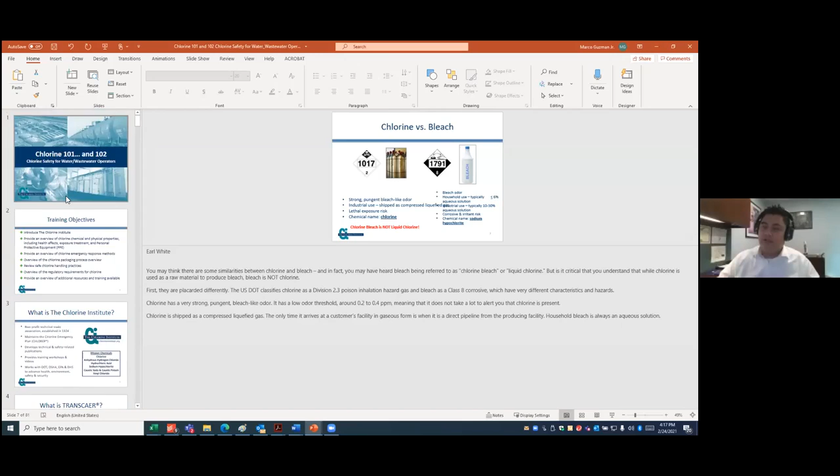Yeah, sorry Earl, I had to reshare my screen. Not a problem, so hopefully you can see it now. Yep, if you can see it. Yep, I can see it just fine. Which one is it? Oh, I think I lost it there again. Hold on, just a second. It's this one. Screen number 2, okay, there it is. Share. Okay, and if any of y'all have questions after this, please feel free to submit any questions that you have. Is there any way you can blow that screen up a little bit more? There you go, yes. Okay, the first thing that go ahead. Go ahead. Oh, okay, I was just going to start off, but if you had something to say, you can go ahead. No, go ahead Earl. Again, I'm sorry, the slides are a little wonky.

No problem. Okay, the first screen we're looking at here is chlorine versus bleach. And as you can see, the chlorine is on the left-hand side of the screen. It's got a UN number of 1017, and it's got a number 2 down at the bottom. The number 2 stands for what class it falls in. It falls into class 2, which means it's a gas. That's how they're classifying it, how the United Nations classifies it.

The one on the right is, of course, bleach, and it's got a UN number of 1791. There's always a lot of confusion amongst people. People use bleach for pools and they call it chlorine, and it's not, bleach is not chlorine. They're 2 different items. Chlorine has a strong, pungent bleach-like odor, and it has a lot of industrial uses, and it's shipped as a compressed liquefied lethal gas, so there is a lethal exposure risk, and the chemical name is chlorine.

And of course, bleach always has a bleach-like odor. What is typically used in your house is less than 6% in strength. What is typically used at a water treatment plant can be anywhere from 10% in strength all the way up to 30% in strength. It is a liquid, so we all know that. And it's corrosive, bleach is, and its chemical name is sodium hypochlorite, but everybody just calls it bleach.

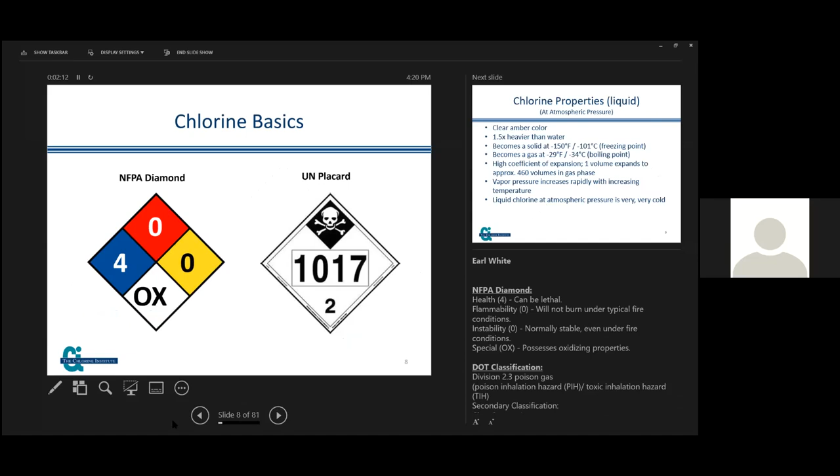Okay, chlorine is a clear amber color, but that's only when it was contained inside of a container. If you had a clear container and could look at liquid chlorine, it would be a clear amber color. We're never going to see that unless we're in a lab. It becomes solid at negative 150 degrees Fahrenheit, that's the freezing point of it. And it becomes a gas at negative 29 degrees Fahrenheit.

It has a high coefficient of expansion. Volume expands approximately 460 times. One volume of liquid chlorine will expand 460 times in volume when it turns into a gas. So that's what we're trying to get to right there.

The vapor pressure increases rapidly with increasing temperatures. So the hotter it gets, the more pressure is going to develop in that container. Liquid chlorine at atmospheric pressure is very cold. So if you had a leak of liquid chlorine anywhere, that area near the leak is going to be cold. As a matter of fact, it'll go into what is called auto refrigeration if it's a small enough leak. If it's a big leak, it's just going to all come out.

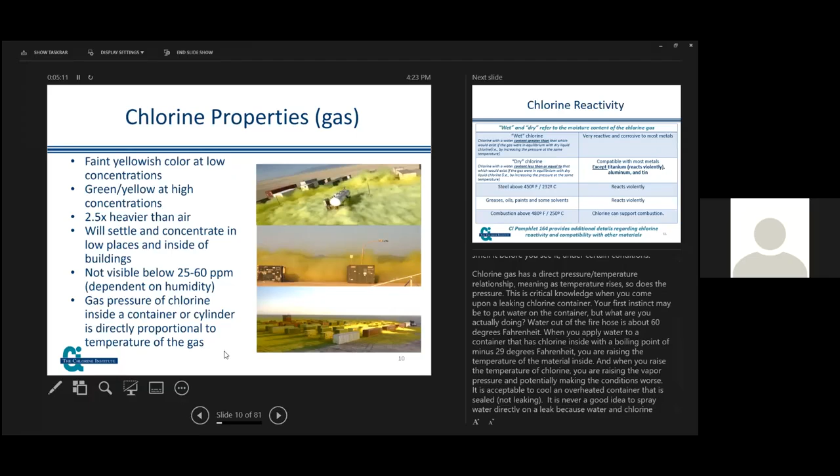Inside a container or cylinder, the pressure of chlorine is directly proportional to the temperature of the gas, which means that if you put a heat source on that cylinder, the pressure is going to build up in that cylinder. So we want to try to keep heat away from those objects.

This is wet and dry chlorine, the difference between the two. Wet chlorine is measured off of what dry chlorine is. They compare the two together, and if it's got more moisture than dry chlorine should have, then it's considered wet chlorine, no matter how much, even if it's just a little bit or a lot. If it's got more than what dry chlorine should have, it's considered wet chlorine, and it is very reactive and corrosive to most metals. It forms two different types of acid, which eats steel rather rapidly.

Dry chlorine is chlorine with a water content less than or equal to that which would exist in equilibrium with dry liquid chlorine by increasing the pressure at the same temperature. It's compatible with most metals except titanium, and it reacts violently with aluminum and tin, and with steel above 450 degrees. So you never want old dry chlorine to be in a steel container and reach a temperature of 450 degrees Fahrenheit or higher.

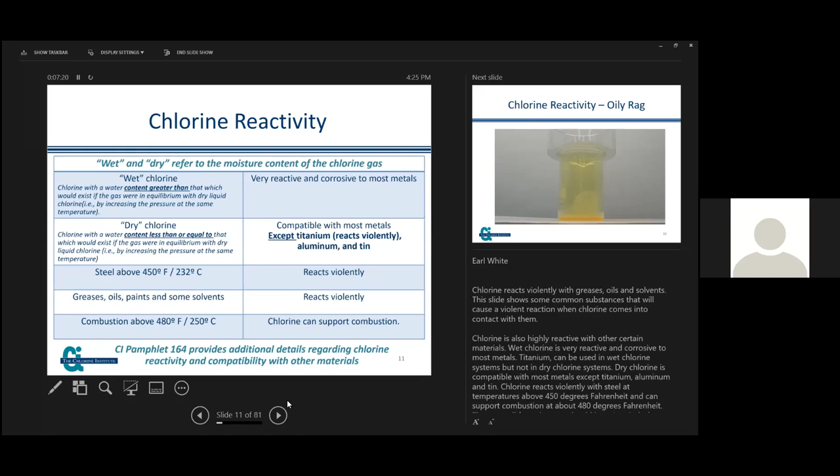It reacts violently with greases, oils, paint, and some solvents. Some metal like steel wool will burst into flames - it supports combustion above 480 degrees Fahrenheit. Chlorine can support combustion, and that's the key word, it can support combustion. That's the reason why in the National Fire Protection Diamond you see a 0 in there - it'll support it, but it won't catch on fire itself. It's got to have something that it's going to react with, like the steel, when the steel reaches 450 degrees Fahrenheit.

And this is a video showing steel wool. Can you hear the video or not? No, we cannot. Oh, okay.

So what they did there is they took a piece of steel wool and put it in a container, came down to about a half inch or so. This is a good reaction - this is even better.

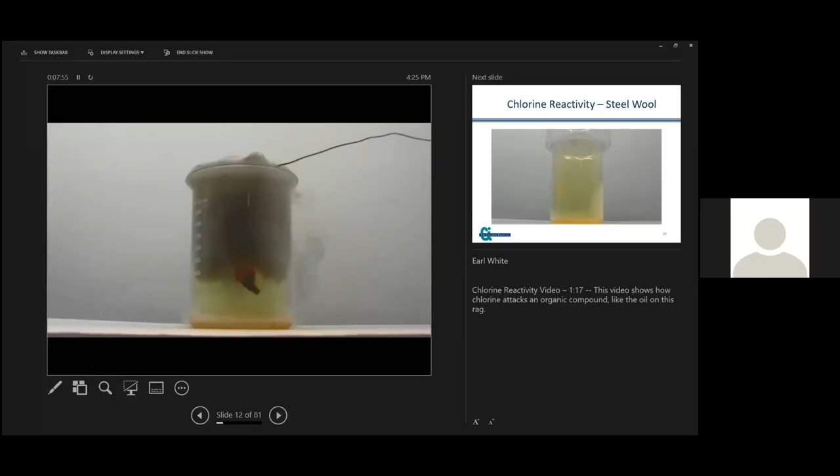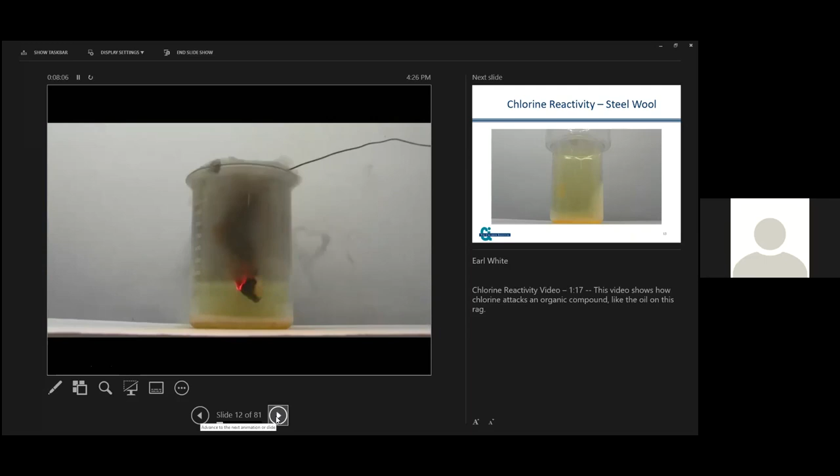See some of the flame up in here. Yeah. Here we go now, look at that. Wicked, huh? That's awesome. We got the sparkles in there. Y'all can pull that down a little bit if you want.

So that video shows just how instantaneously it will react with something that's not compatible with it, like steel - that was steel wool there. It'll react violently with grease, oil, and other things that it's not compatible with.

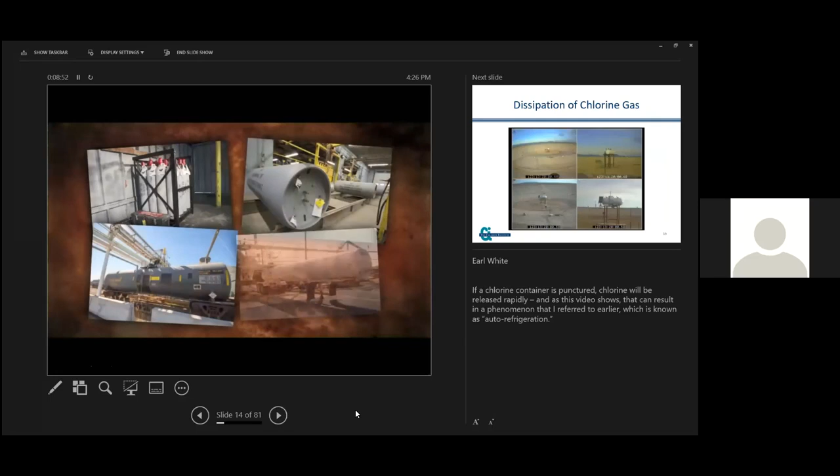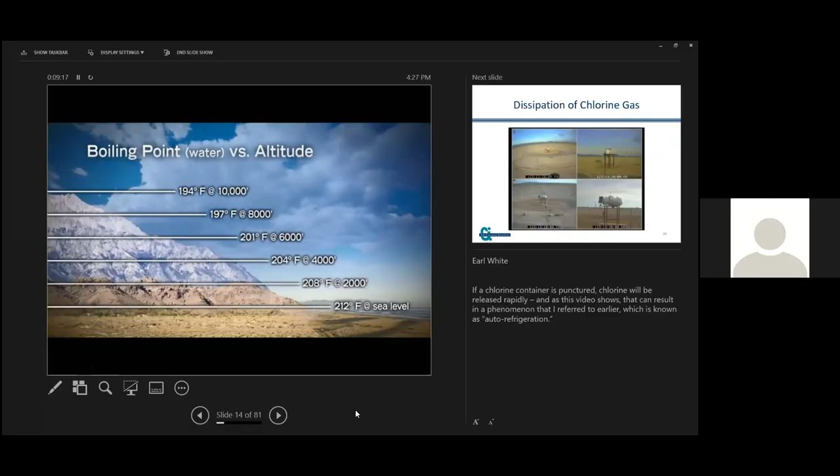Cylinder, ton container, tank car, or cargo tank holds a liquefied gas under pressure. The temperature of that liquefied gas is cool, but not so cold that the exterior of the container would be cold to the touch. At higher pressures, liquids boil at higher temperatures. At lower pressures, liquids boil at lower temperatures. This is why water boils at lower temperatures at higher elevations above sea level - the atmospheric pressure is lower, so the boiling point is lower.

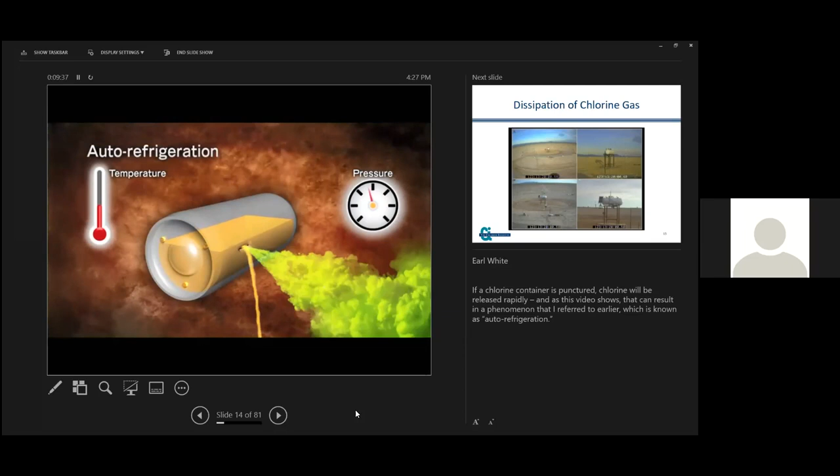When a chlorine container is punctured, allowing the chlorine to release, at first the chlorine will escape rapidly. As the chlorine is released, the container that was under pressure will now equalize in pressure with the atmosphere. Once the liquid level drains below the puncture point, auto-refrigeration takes place.

Auto-refrigeration is the result of chlorine quickly escaping from the container, which causes the chlorine to cool down below its boiling point at the new lower pressure condition. It becomes colder because it is no longer under pressure from being in an enclosed container.

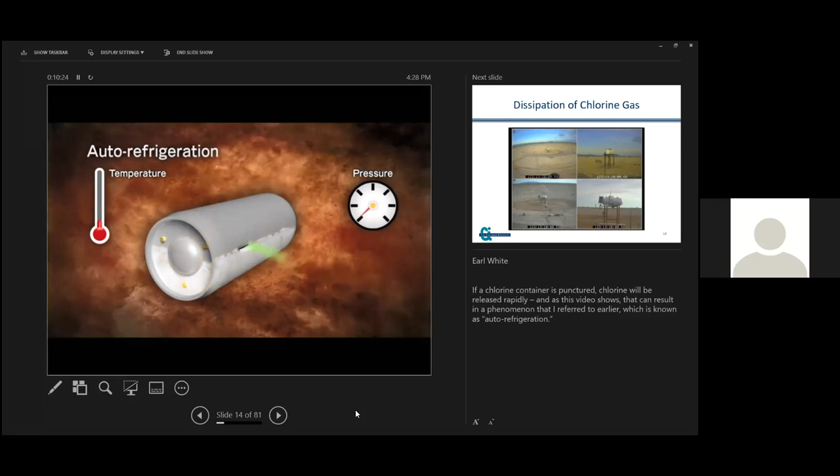Because the chlorine remaining in the container is so cold, a visible frost layer will form on the outside of the container at the liquid line, typically the level of the puncture. When this occurs, the rate of release will significantly decrease, although there is still a considerable amount of liquid chlorine remaining. However, any heat source, like water, or agitation, like moving the container to a secure location, can cause the remaining liquid chlorine to vaporize and allow more vapor chlorine to escape.

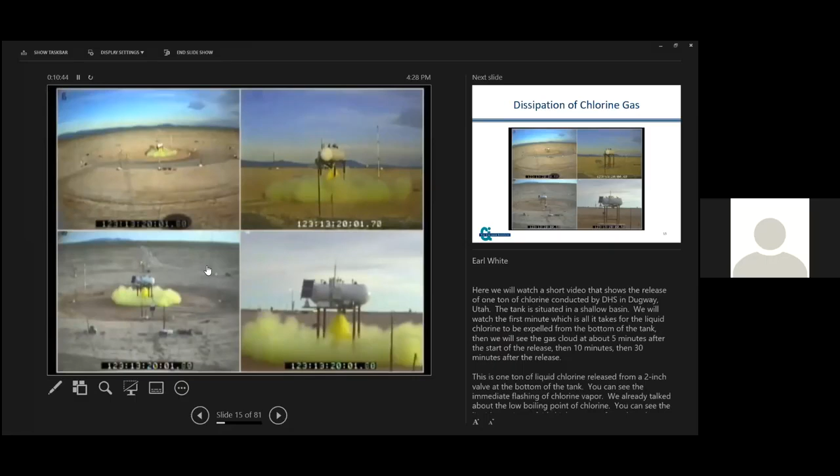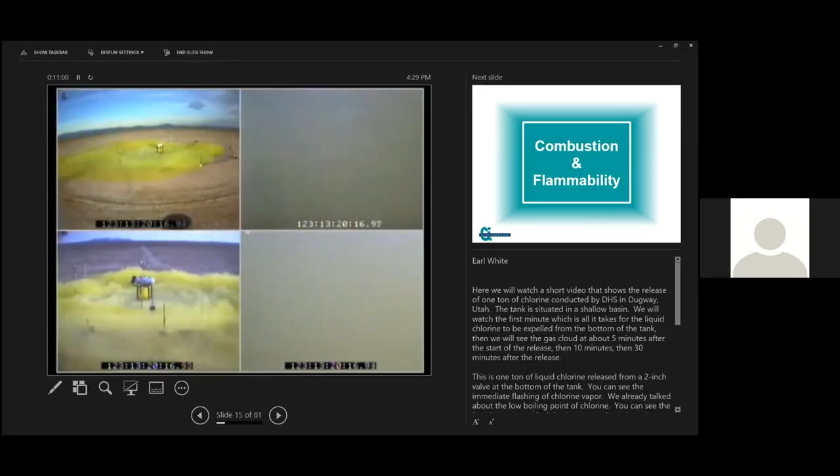This was out at Jackrabbit 1, 2, and 3, where DHS, Department of Homeland Security, wanted to see what would happen during the release of chlorine. We released anywhere from 5 tons to 10 tons at different times, all the way up to 20 tons that we did in one shot, one time.

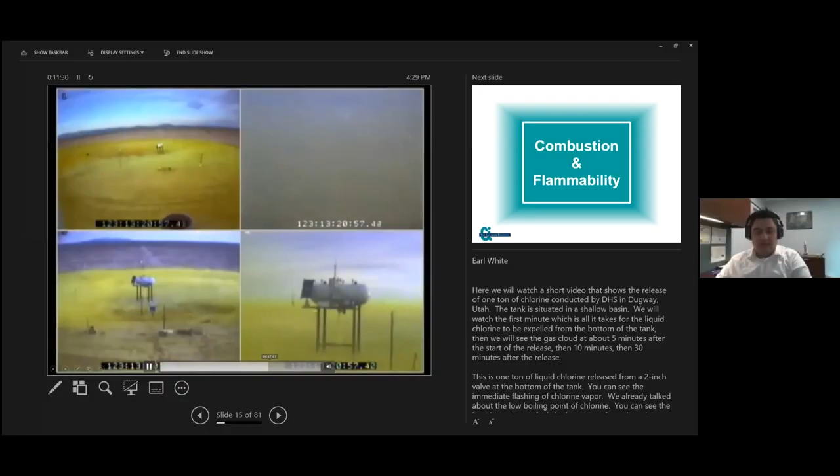I think this video wants to compare the initial release to 10 minutes after. We can see the cloud at the initial release, and then 10 minutes after, you can see the cloud sort of become smaller. However, there's still chlorine present - you can see the green, white, yellow, greenish hue there with chlorine.

And even then, this is at 30 minutes after the release. You can still, even though you cannot see it anymore, there's still chlorine present. Is that correct? Right, there was.

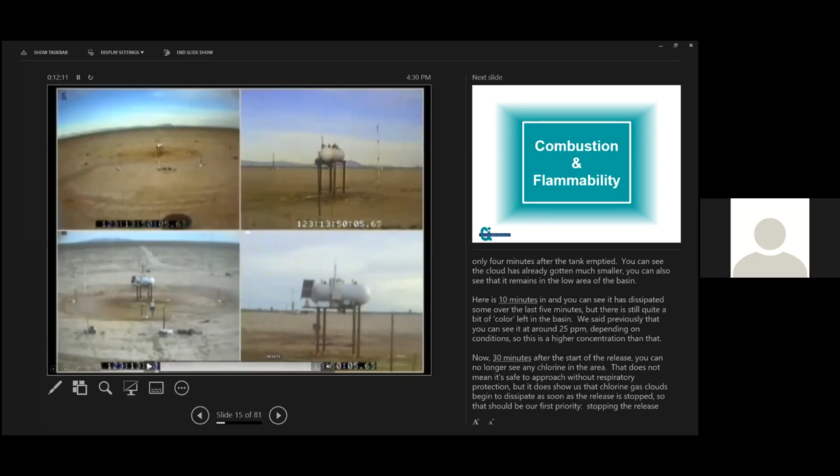Now, wind also played a role in these tests because we waited for the wind to be blowing at a certain speed and in a certain direction. What should be noted about one of these tests - I think the first one we did - we had some birds come and fly and sit on top of the tank right after we did the release, and then they flew off afterwards. It didn't hurt any of them, because they were high enough up off the ground. If they had been down along the ground, it would have damaged them.

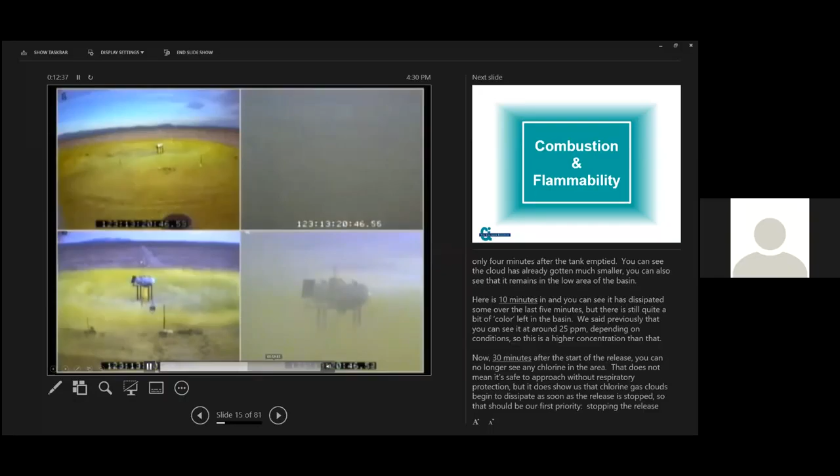Combustion and flammability. Go ahead and click to the next screen.

Chlorine is not flammable. It goes back to the fire diamond again - there's a 0 up there in the fire part of it. Chlorine will support combustion in the presence of ignited flammable materials, like that steel wool. Combustion requires 4 things: heat, fuel, oxidizer, hence the reason chlorine supports combustion - it has secondary classification as an oxidizer - and a chemical chain reaction.

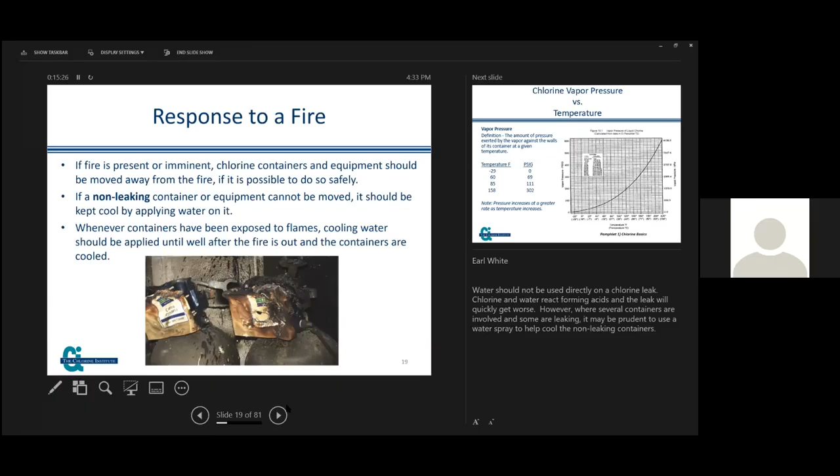Until the containers are cool. This one seems to jump around quite a bit.

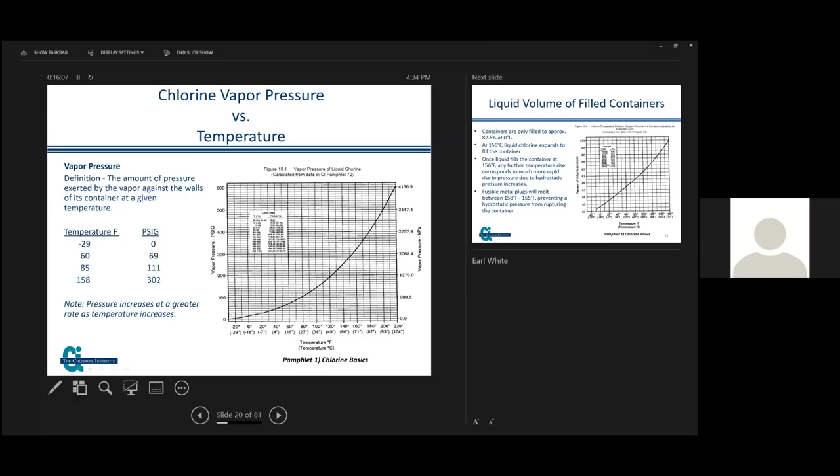The definition: the amount of pressure exerted by the vapor against the walls of its container at a given temperature. So what this is showing is what would happen if that container got hot, and it shows you that the pressure drastically increases. And when it starts to increase and it gets too much, you're going to cause something to explode, or the fuse plug is going to release. Next screen, please.

Containers are only filled approximately 82.5%, so they're never filled completely full. At 156 degrees Fahrenheit, liquid chlorine expands to fill the container. That's the reason why we only fill them to 82.5.

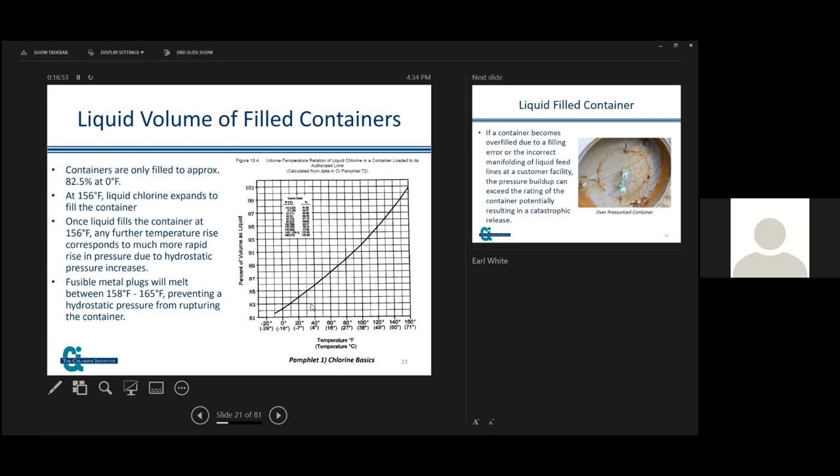Once liquid fills the container at 156 degrees, any further temperature rise corresponds to a much more rapid rise in pressure due to hydrostatic pressure increases, as this chart shows. You can look on one side and see the temperature and the pressure that is increasing.

If a container becomes overfilled due to filling error or incorrect manifolding of liquid feed lines at a customer's facility, the pressure buildup can exceed the rating of the container, potentially resulting in a major disaster.

What you're looking at on a ton container, the ends will pop out. It's designed that way. They won't completely break away from the container, they just bulge outwards. That allows it to expand a little more. Both ends are capable of doing this. Generally, if it happens, you'll start developing small leaks on the container around the valves and fuse plugs. That's something you want to watch out for.

Vapor expansion: the amount of vapor that is produced when the liquid vaporizes. Vapor expansion of liquid chlorine is approximately 460 to 1. So a 150-pound cylinder of chlorine, if it's full and it's released, will fill a room that is 10 foot by 10 foot by 8 foot with 100% chlorine gas.

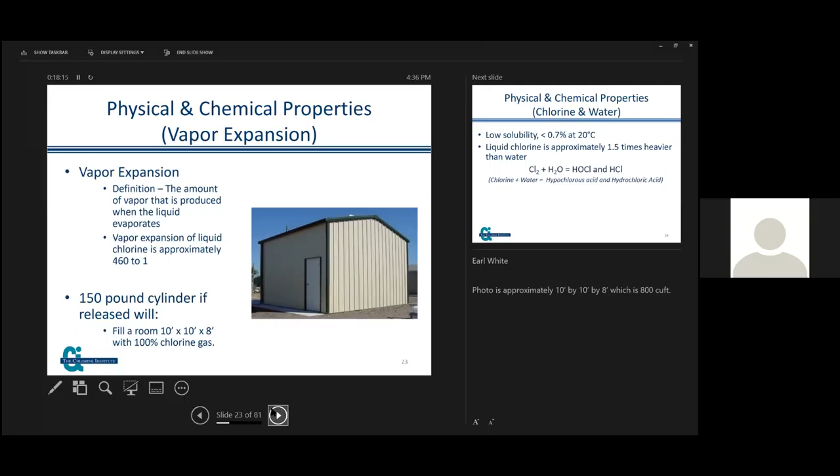If you mix it with water, it really doesn't mix well with water, as shown here. Less than 0.7% will mix with water at 20 degrees Celsius. Liquid chlorine is approximately 1.5 times heavier than water, which gives you the equation for that.

It also talks about the two acids there, hypochlorous and hydrochloric. At the bottom, it shows the two acids that will form when you mix chlorine with water: hypochlorous acid and hydrochloric acid.

Chlorine health effects: at 0.2 to 0.4 parts per million, that's the odor threshold, when you can start smelling the chlorine. At 0.1 part per million, that's the ACGIH 8-hour time weighted average suggested for people. At 0.4 parts per million, that is the short-term exposure limit. At 1 part per million, that's the OSHA ceiling limit.

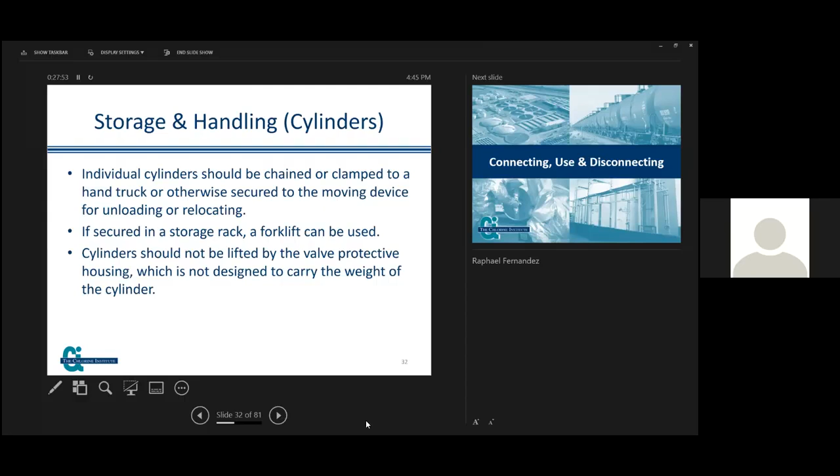Connecting and disconnecting. Chlorine cylinders, typical.

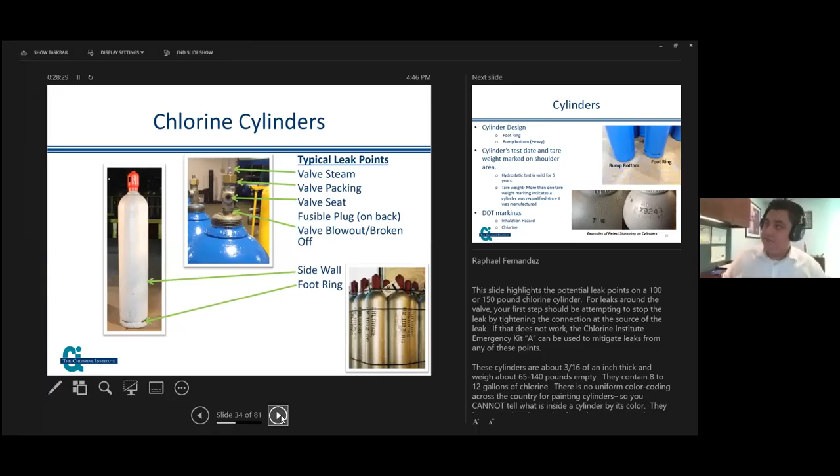I got a question for you - are your slides out of order? The one before said connecting and disconnecting, and then it immediately goes into... now click the next one. Yeah, see, now it goes into typical leak points. Yeah, I thought I'd come across that once or twice before in this presentation. Let me see if that's the one we shared with you, but it's kind of throwing me off here. I mean, I can talk about connecting and disconnecting without the slides. Just very quickly, because the connecting and disconnecting slides show pictures of the valve and the yoke and stuff like that. Yeah, open up another one.

No, that's actually how I have it. Well, it does talk about...

It talks about cylinders, valves, and then connection and disconnection. So I guess it introduces the concept of what a valve is, and what disconnecting and connecting refers to. I'll send you the one I did from 2019 down in Fort Lauderdale, and you can look and see the differences between the two presentations.

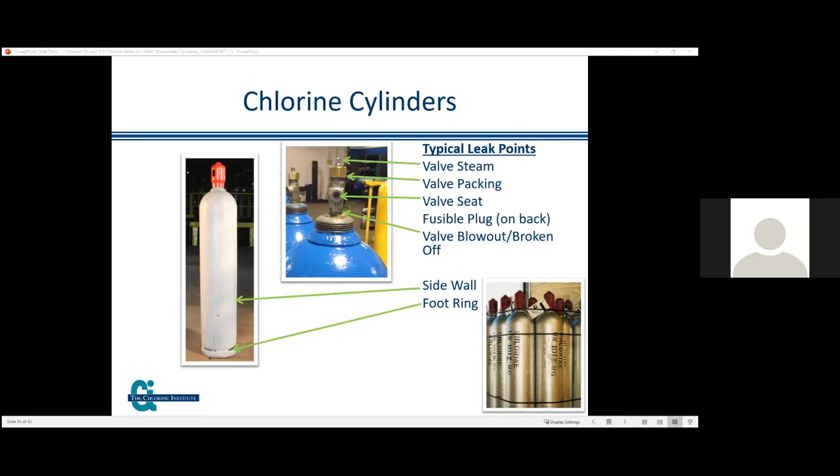So, cylinder test dates and tare weight marked on the cylinder shoulder. On the very top of each cylinder, you're going to find a bunch of numbers, okay? Unless you've worked with them, you may not know what they mean. You're going to have a DOT number, which is Department of Transportation number for the cylinder. You're going to see a letter that says TW, and that's the tare weight of the cylinder, which is the weight of the empty cylinder without the chlorine in it.

And then you're going to find a hydro test date on there also. The hydro test date is valid for 5 years. Every ton and cylinder container out there has to be tested every 5 years. More than one tare weight marking indicates a cylinder was requalified since it was manufactured. A cylinder will lose tare weight over time, and that can happen, but it goes through a hydrostatic test to ensure it can continue to be used in the shipping of chlorine.

So DOT markings, we talked about that. Go ahead and click to the next screen.

Now, also on the cylinder and ton containers, you're going to find stenciled on here: chlorine inhalation hazard with the UN number on there, and it's going to have RQ on it also, which stands for reportable quantity, which tells somebody that if there's a leak in either one of those devices, they have to report it to a government agency. On a ton container, it's going to have that marking on two opposing sides. On the cylinder, it's only going to have it once.

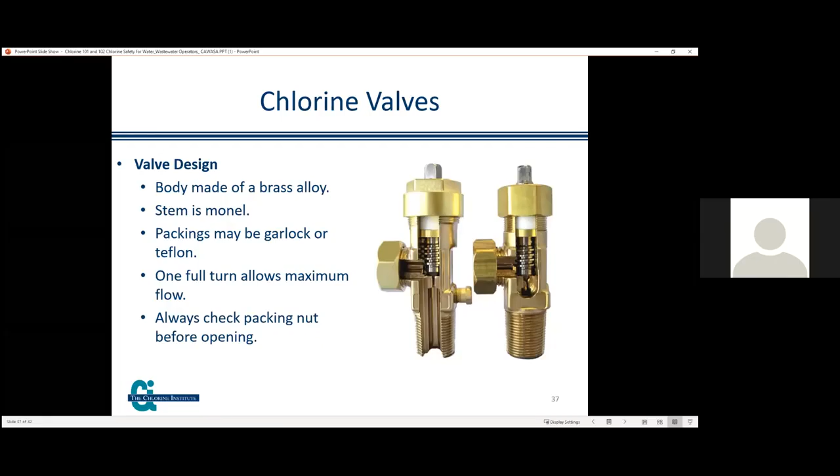Fuse plug is part of the valve. This is cylinder valves on the left-hand side of your screen. Wish there was an arrow pointing to it, but the fuse plug is part of the valve. It's only 3/4 of an inch, which is NGT inlet threads, and 4 oversized versions are available.

They are, because taking these valves in and out of these cylinders, everybody who fills cylinders has to inspect the cylinder before they can refill it each time. So that's mandated. We pull these cylinders out when they come back to be refilled, and they're put back in. When you do that repeatedly, you have to go up to the next size valve. It doesn't affect the overall valve, the part that you guys use - it's just the valve threads that screw into the cylinder itself.

The ton container valves, there is no fuse plug on them. So if you get a 150-pound cylinder and it doesn't have a fuse plug, somebody put the wrong valve in that 150-pound cylinder. If you get a ton container and it's got a fuse plug on the valve, somebody put the wrong valve in that ton container. You need to notify somebody immediately of that. Don't be using them if the valves are the incorrect ones.

There's no fuse plugs, maybe 3/4 of an inch or 1 inch threads on there. Valve seats openings are larger than cylinder valves. 4 oversized versions are available.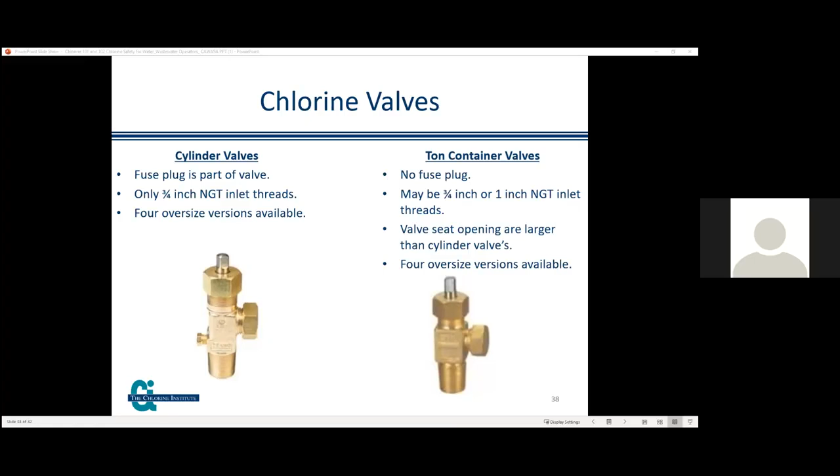Washers replaced after each use. Used lead washers must be disposed of properly. Check valve outlet face for imperfections, which is what I was talking about earlier, that may prevent gasket from sealing. Some chlorinators may not require a yoke to mount - there are some out there that don't.

CGA connection 660 is not recommended to connect to the cylinder valve. Valve outlet threads are not standard tapered pipe threads. Do not use standard pipe fittings.

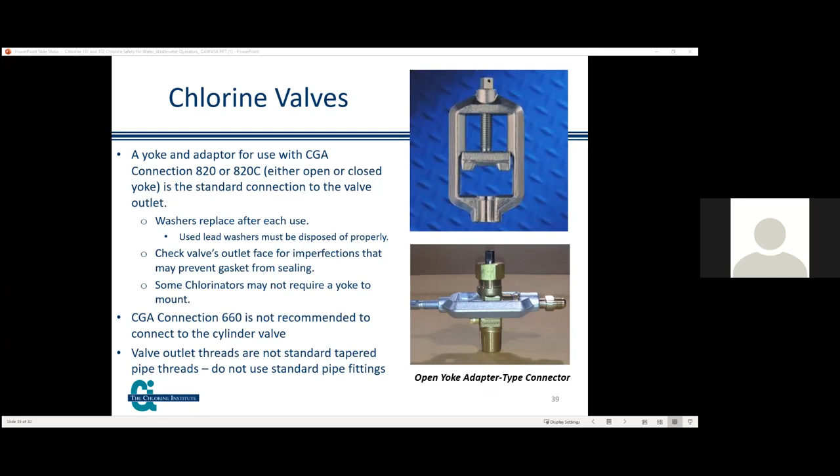The suggested steps for connecting cylinders or ton containers are: wear the required PPE, protect yourself, remove the valve hood or valve protection bonnet, the bonnets that are on the ton containers. Make certain that the packing nut is at least hand tight. If it is not, contact your supplier for advice. Make certain that the valve is closed before removing the outlet cap.

Remove the valve outlet cap. Note that for ton containers, which valves vertically align, the upper valve dispenses gas and the lower valve dispenses liquid. Make certain the valve face is clean and smooth. Use a new appropriate ring gasket connection yoke and yoke adapter to the valve. Never reuse gaskets. Tighten the yoke to make sure a good seal, but do not over tighten.

The suggested steps for disconnecting a cylinder or ton container are: wear PPE. Close valve using torque wrench to a torque of 25 to 30 foot-pounds. Check for pressure drop to 0.

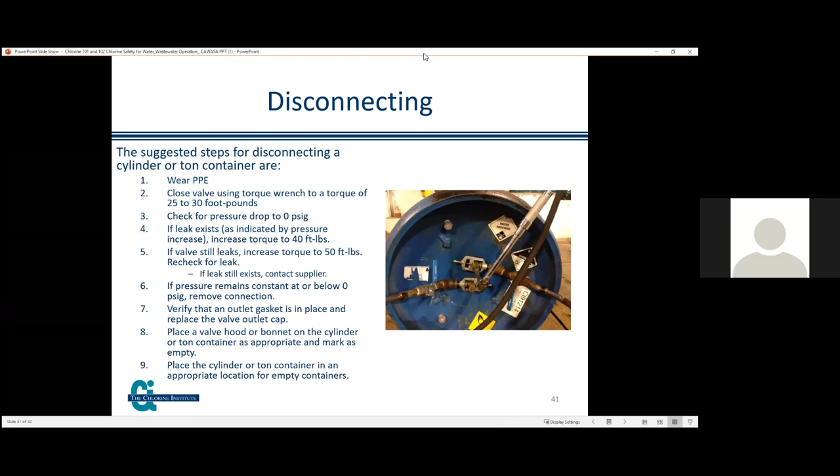Verify that the outlet gasket is in place and replace the valve outlet cap. Place the valve hood or bonnet on the cylinder or ton container as appropriate and mark as empty. Place the cylinder or ton container in an appropriate location for empty containers.

Excessive torque does not usually help the situation. If valve is difficult to open, a sharp blow to the wrench versus a slow increase in pressure on the wrench may open the valve. Alternate is to return the cylinder to your supplier.

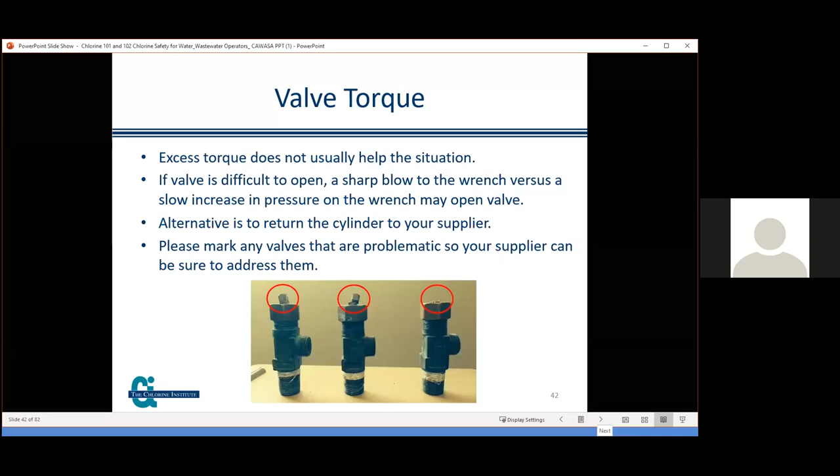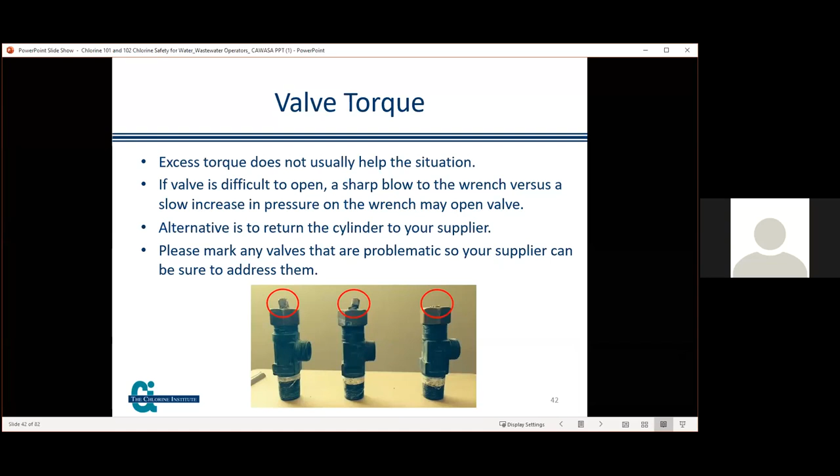So if you get a ton or cylinder container in there and you can't open it, every now and then you can put the wrench on there and give it a sharp blow and it may pop it open. But don't beat on it. You don't want to break the valve stem off, and you don't want to get it open to where you can't close it either. So it's just best to contact your supplier.

A plastic squeeze bottle containing a 10 to 30% solution of aqua ammonia can be used to check for leaks. Direct the vapor, never the liquid, from the squeeze bottle at the potential leak source. Ammonia in household cleaners is not suitable for this purpose; it's too low of a concentration.

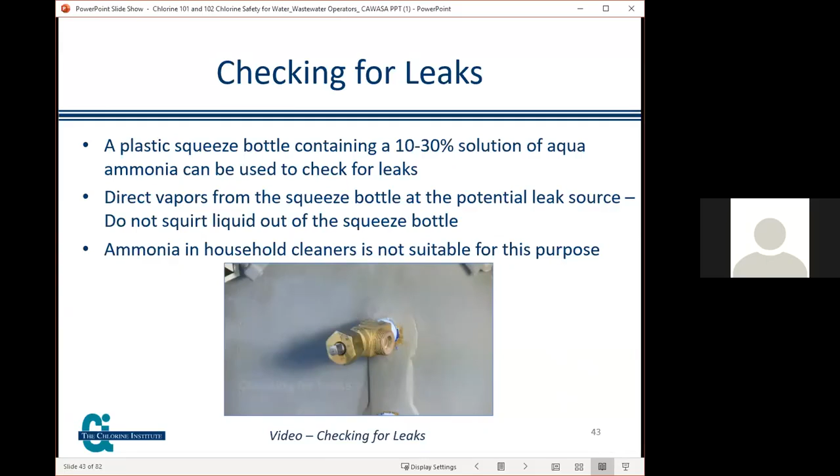For minor leaks, if the packing gland is the source, first close the valve and then tighten the packing gland nut. If it still leaks, make sure the valve is closed, then retighten the packing gland. Care must be taken when tightening the packing gland.

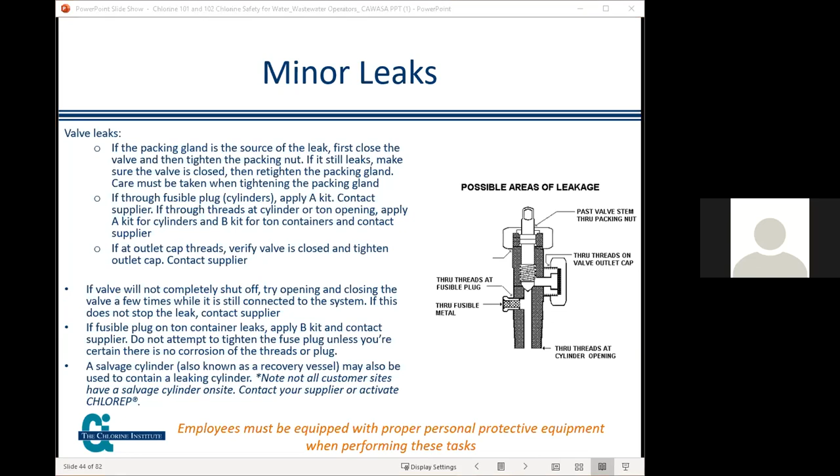If the leak is through the fusible plug of the cylinder, apply the A-kit. If it's through the threads at the cylinder or ton opening, contact your supplier. Apply the A-kit for cylinders and the B-kit for ton containers, and contact your supplier. If you have a recovery vessel, you can use it for the cylinder. You can slide a full 150-pound cylinder into a recovery vessel.

Remember, leaks only get worse. Take action when leaks are noticed. If you just walk away thinking it's a small leak and it'll go away, it will not go away. It will only get bigger.

Please label or tag any bad valves so the supplier can follow up on the issue. On ton containers, you have two valves. What we generally suggest is that you take a marker and circle the valve that's causing you problems, whether it's hard to open or leaking.

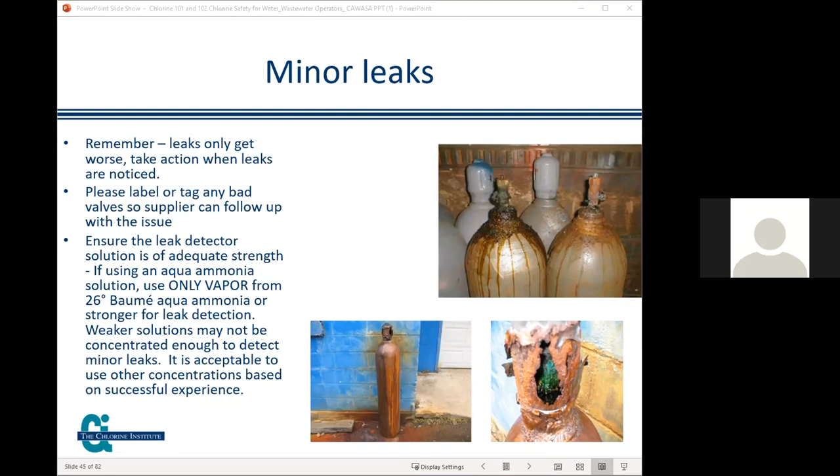Ensure the leak detection solution is of adequate strength. If using an aqua ammonia solution, use only vapor from the 26 Baume aqua ammonia or stronger for leak detection. Weaker solutions may not be concentrated enough to detect minor leaks. It is acceptable to use other concentrations based on successful experience.

Take a break, or we can move on. Oh sorry, I was muted. I was thinking maybe we should just keep going, given that we're behind and still have a lot of material to cover. Okay, I'm fine with that, yeah. I suggest we continue. Yeah, that's fine.

Chlorine emergency response. Next slide.

This is your emergency kits. In the upper left-hand corner you're looking at an A-kit. In the upper right-hand corner, a recovery vessel for 150-pound cylinders and smaller cylinders. In the lower left-hand corner, a B-kit. And in the lower right-hand corner, a C-kit for rail cars.

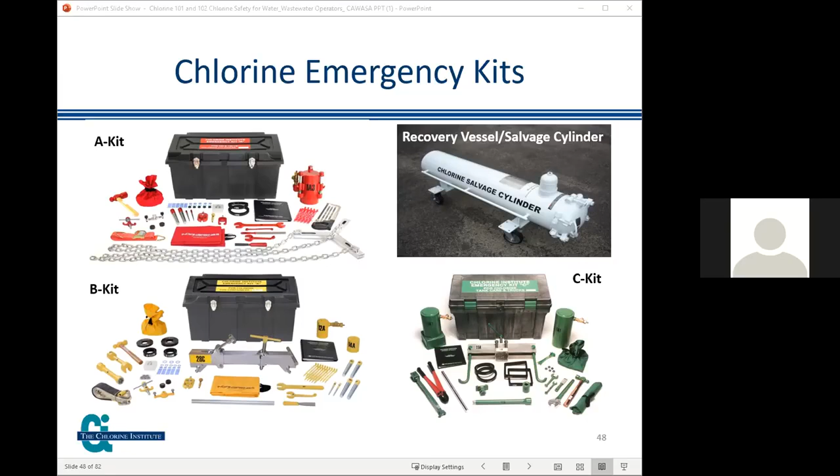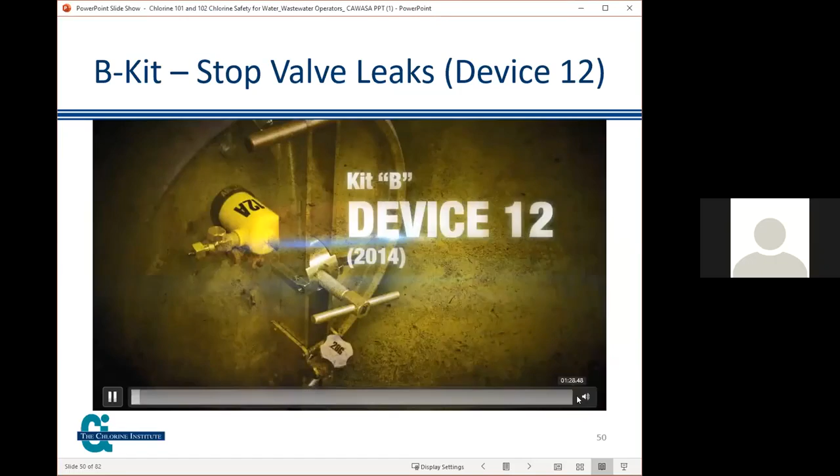Device 12 can be used to contain all leaks in and around the container valves. Remove the valve protective hood if in place and position the container so that the leaking valve is in the top, or gas, position. This results in a chlorine gas leak and not a liquid leak.

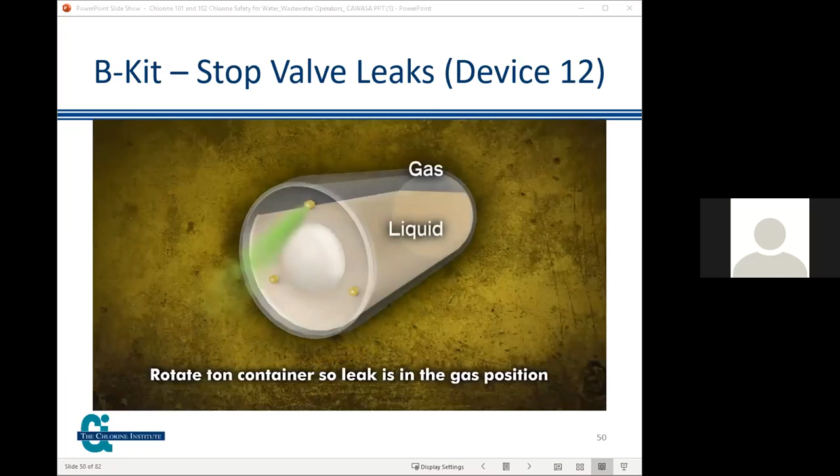Use the paint scraper to remove paint, scale, and rust from the face of the container. Place the adjustable end of bar assembly 28C inside and on the bottom of the chime lip, with the bar extensions resting outside the chime. Compress the assembly downward using the handles.

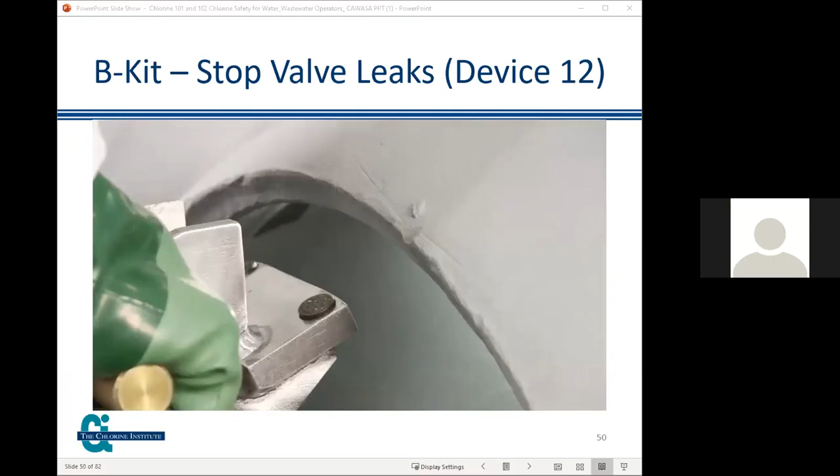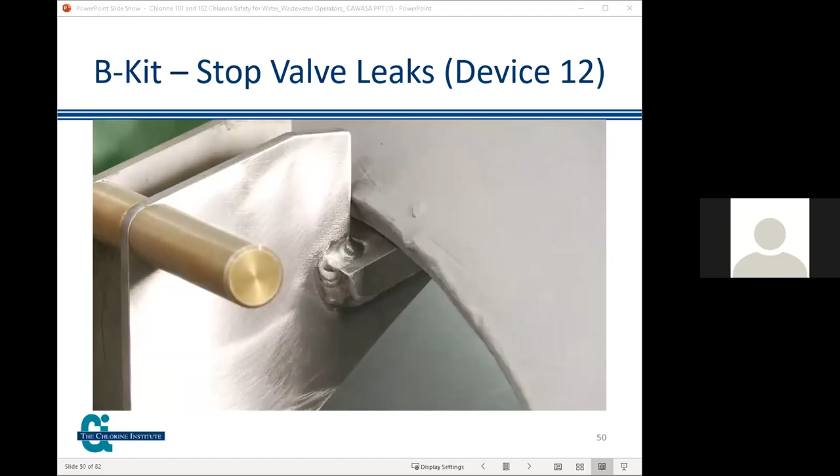Insert the upper end of the bar assembly inside the chime. Reduce resistance to allow the unit to expand into the upper chime lip, with the upper bar extensions resting on the outside of the chime. Place a new gasket on hood 12A.

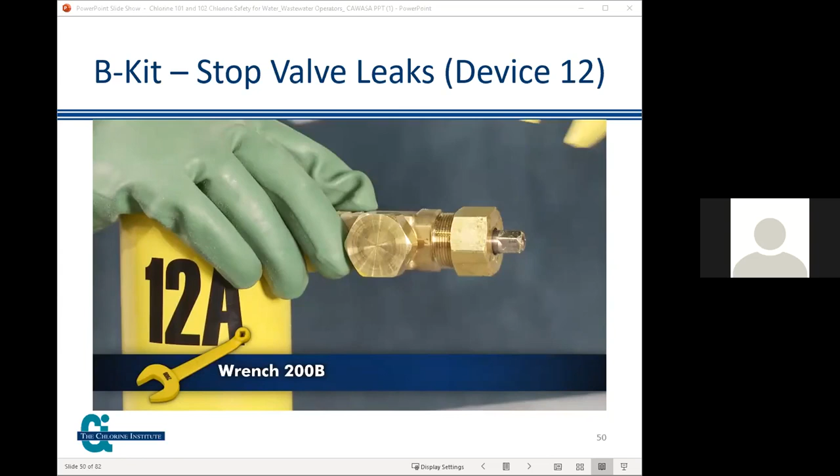Open the vent valve on hood 12A and remove the outlet cap. Install hood 12A over the leaking valve. Hand tighten screw 28D, forcing the hood 12A and gasket against the head of the container.

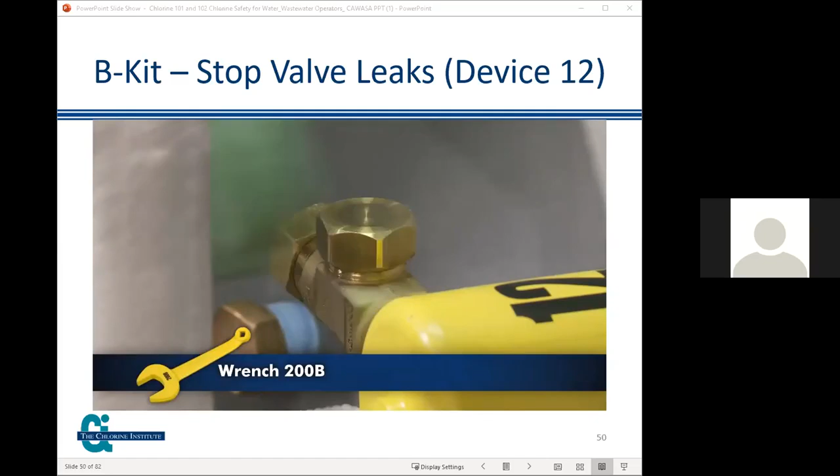Close vent valve 12V on the hood using wrench 200B. Replace the vent valve outlet cap. After the kit has been applied, periodically check for leaks because pressure will build up inside the hood.

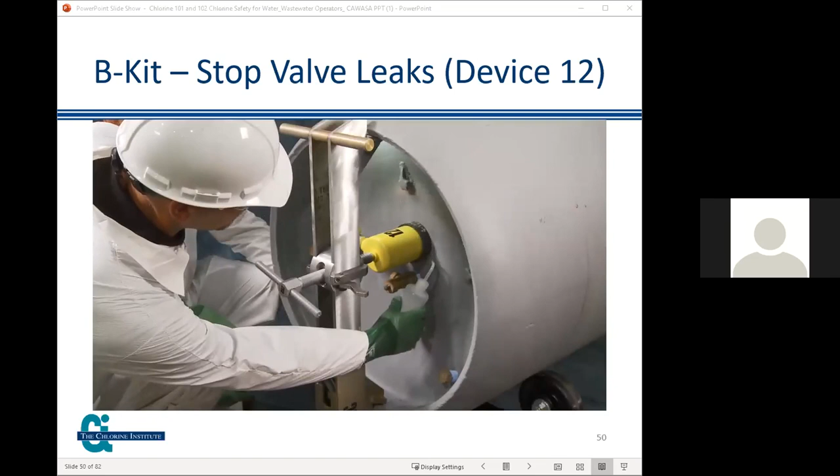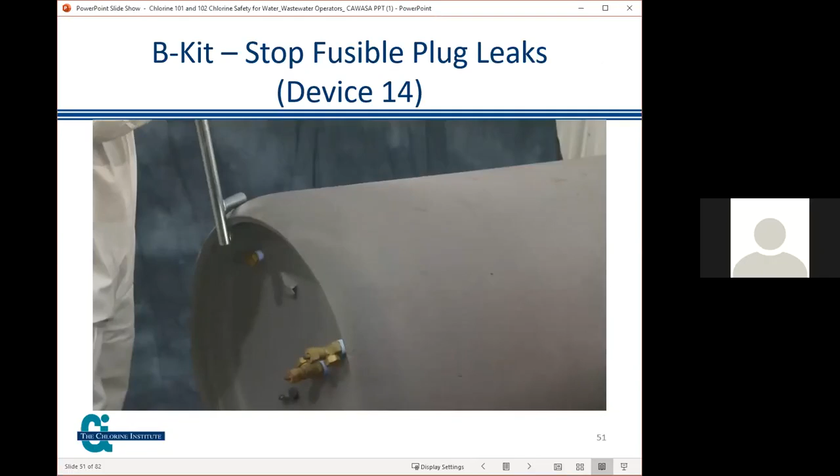Device 14 can be used to contain all leaks in and around the fusible plug. Position the container so that the leaking fusible plug is in the top, or gas, position. This results in a chlorine gas leak and not a liquid leak.

Use the paint scraper to remove paint, scale, and rust from the face of the container. Place the adjustable end of bar assembly 28C inside and on the bottom of the chime lip, with the bar extensions resting outside the chime. Compress the assembly downward using the handles.

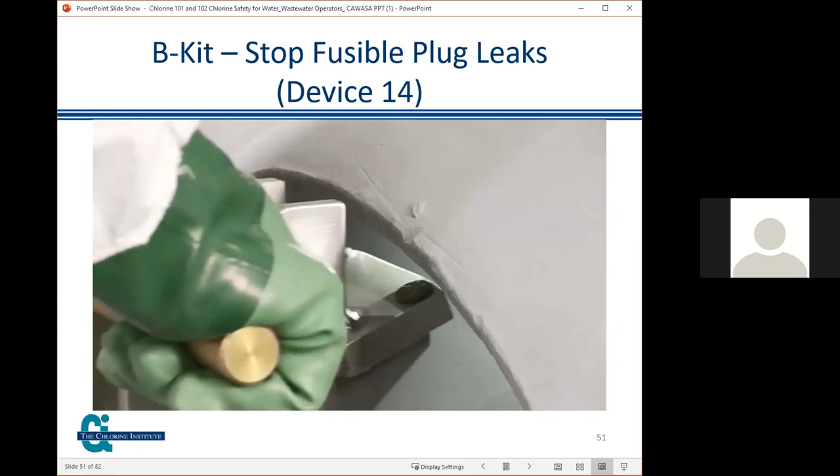Insert the upper end of the bar assembly inside the chime. Reduce resistance to allow the unit to expand into the upper chime lip, with the upper bar extensions resting on the outside of the chime. Tighten locking screw 28G until hand tight.

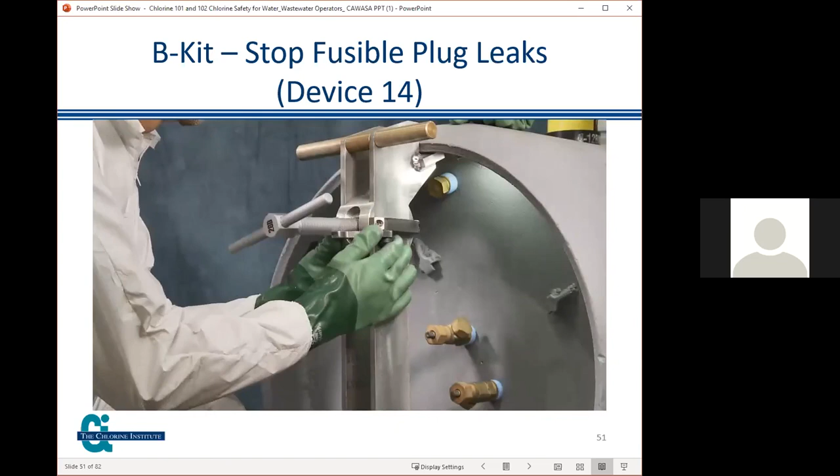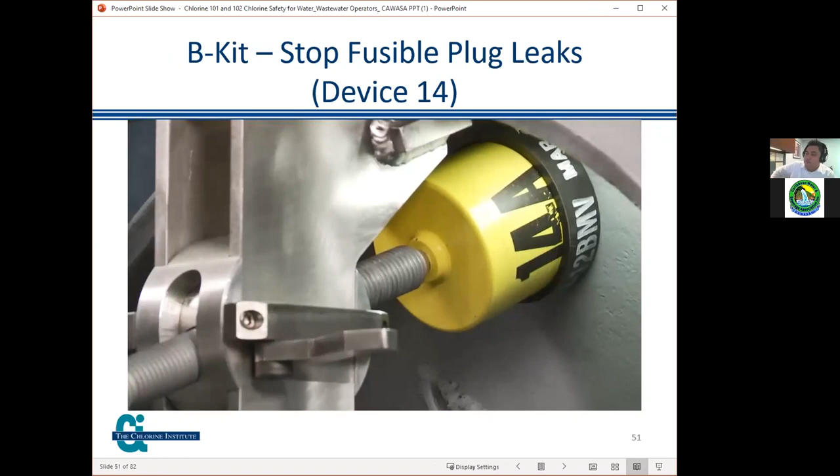Place a new gasket, 4-12 BMV, on the hood 14A. Loosen locking lever on screw 28D unit and slide over the leaking fusible plug. Install the hood 14A. Hand tighten screw 28D, forcing the hood and gasket against the head of the container. After the kit has been applied, periodically check for leaks because pressure will build up inside the hood.

It should be noted, guys, that that was a B kit. There are now 2 B kits out there - that is the new style B kit. There is an older style B kit that everybody may be familiar with. So just know that there are 2 different types of kits out there now from Indian Springs, and the one you just saw is easier to use and apply than the old kit. It's a lot lighter and everything.

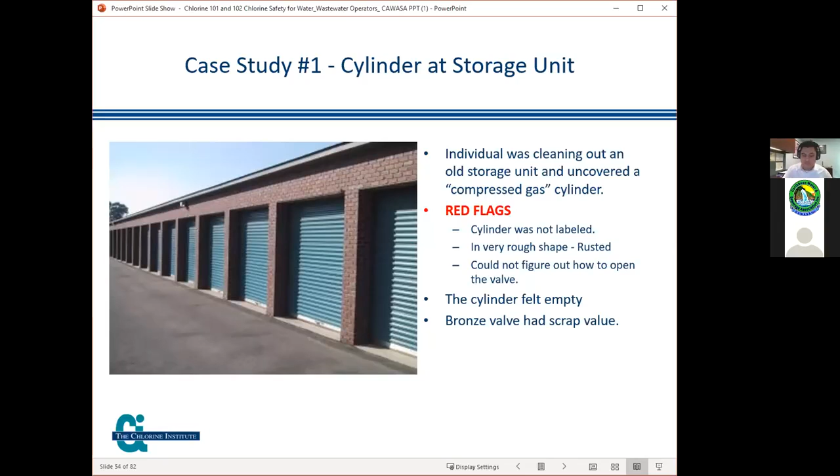The individual attempted to remove the valve by striking it off, probably with a hammer. There was still an estimated gallon of chlorine in the cylinder, so when he struck the valve, there was a release.

St. Paul Fire Department was called to the scene. Multiple individuals were transported to the hospital. The cylinder appeared to have essentially stopped releasing material. No call to CHEMTREC was made, nor in transportation. Unfortunately, it's one of those incidents, and there are numerous ones out there with cylinders.

St. Paul Fire Department has a well-funded hazmat team with their own salvage cylinder. Auto-refrigeration occurred, and they assumed it was empty - they assumed the cylinder was empty, and they were just seeing residue gas based on the small amount of vapor coming out of it.

Because of the small amount of liquid left in the cylinder, the frost line was hidden on the bottom, so they couldn't see exactly how much was in there. This lack of situational awareness resulted in exposure to cold liquid chlorine for 2 members of the fire department when they attempted to pick up the cylinder. They finally called CHEMTREC.

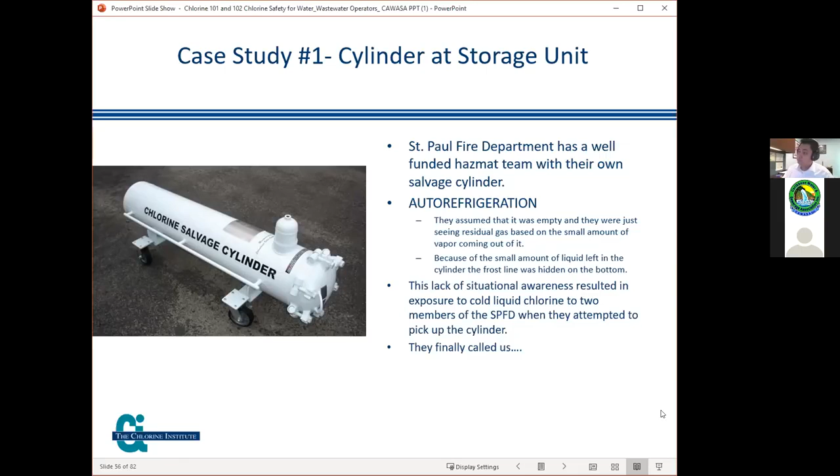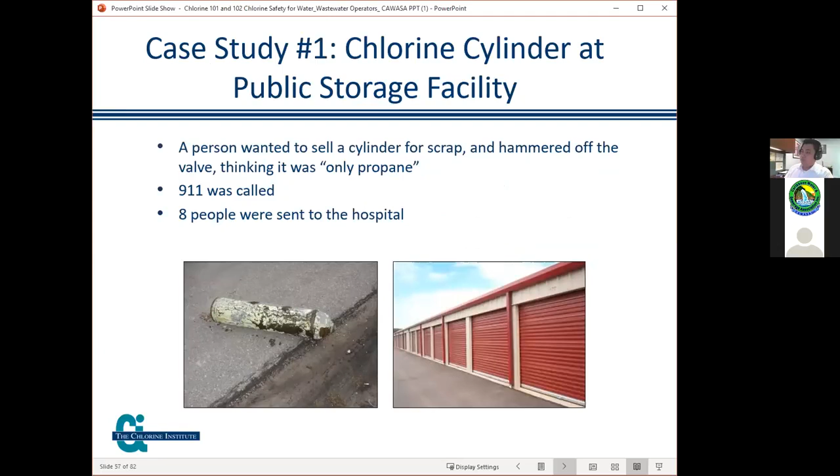Local firefighters responded and attempted to put the cylinder in a recovery vessel, spilling auto-refrigerated liquid chlorine in the process. Local hazmat response was activated, and a local private emergency response contractor was called. The private contractor called the CHLOREP team for advice - note, they had previously met at a TRANSCAER event. The CHLOREP team leader urged the contractor to officially activate CHLOREP through CHEMTREC.

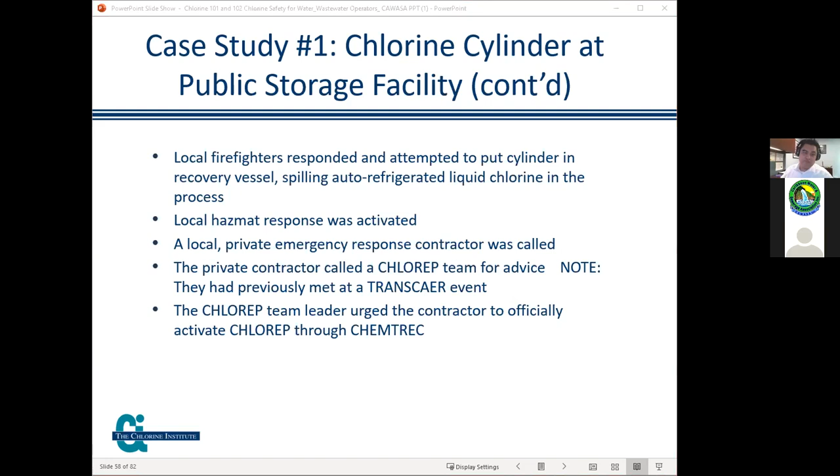The cylinder was safely in a recovery vessel at this time. The CHLOREP team leader called a secondary team, who retrieved the cylinder the next morning and properly disposed of it.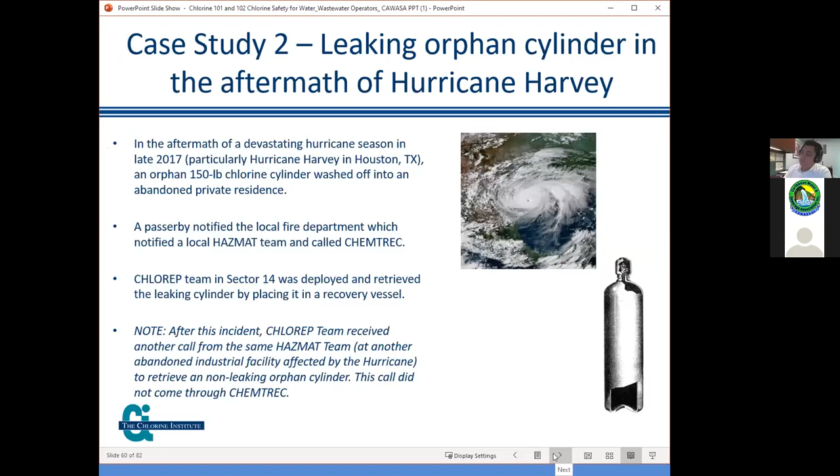County Fire Marshal and the local hazmat team stated that the leaky cylinder was located within the perimeter of the residence of the resident's yard. The bottom base of the cylinder was corroded and leaking. No visible cloud formed, but a bleach-like smell could be detected. No reported injuries. The CHLOREP team could not identify the origin of the cylinder due to its degree of deterioration.

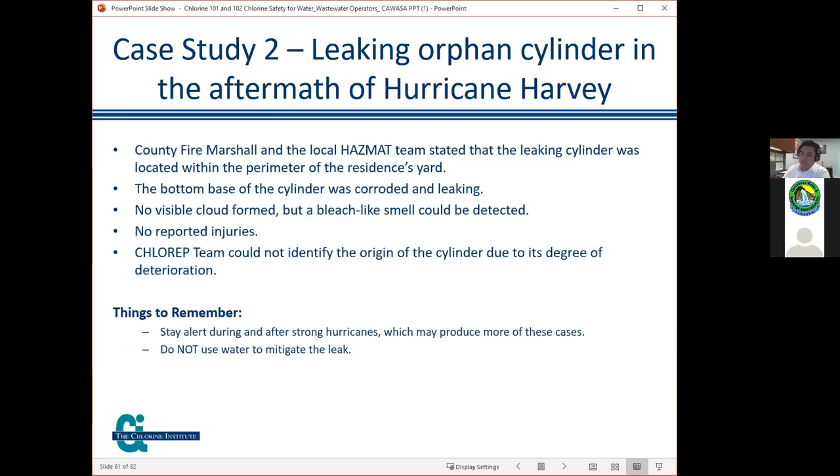Things to remember: stay alert during and after strong hurricanes, which may produce more of these cases. Do not use water to mitigate the leak.

Community preparedness and public protective actions. Protect the public from harm - that's number one item. Protective actions initiated after the isolation perimeter is established. Safe and hazardous control zones are defined. Tactical options.

Notification, reverse 911, evacuation, shelter in place, a combination - not mutually exclusive, which means you don't have to follow this exact step depending upon what's going on in your area.

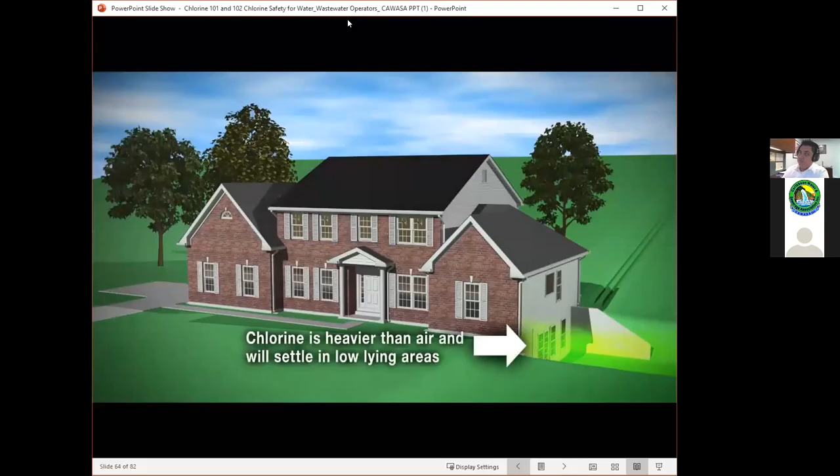Since chlorine is heavier than air and will settle in low-lying areas, people should move to upper floors if possible. Do not go to the basement.

In many communities, especially in the tornado-prone Midwest, the general public has been trained to move to underground shelters or basements in an emergency. This is the exact opposite of what should be done during a chlorine release, as chlorine gas may find its way into basements.

Move upstairs or to higher floors if possible. However, do not move to an attic. While attics may be the highest level in a house, they are typically vented in such a manner that they cannot be effectively sealed with duct tape and sheeting. These may include ridge vents, gable vents, and exhaust vents.

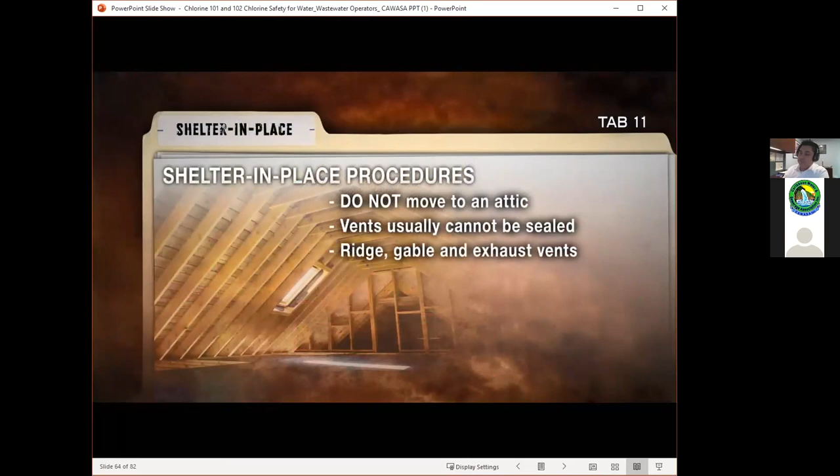In order to help prevent a gas cloud from seeping into the structure, quickly close all doors and windows and seal them with duct tape and plastic sheeting. From the inside, jam wet towels on exterior door bottoms and thresholds. Turn off any air conditioning, heating systems, whole house fans, and bathroom exhaust fans.

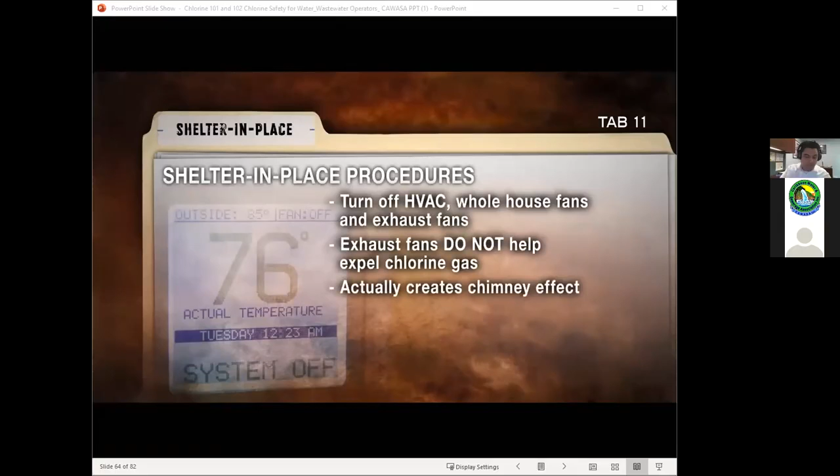The public may think that running an exhaust fan may help expel any chlorine gas that may have entered the premises, but this could actually create a vacuum or chimney effect, drawing in the chlorine gas.

For maximum protection, shelter-in-place occupants should go to a windowless room, such as an interior bathroom. It's critical that occupants stay connected to first responders, so they need to take a means of communication with them into the safe room: cell phone, telephone, walkie-talkie, CB, or radio.

Shelter-in-place occupants must remain in place and wait for instructions. They need to wait for rescuers to come to them. They cannot assume it's safe to emerge until instructed to do so.

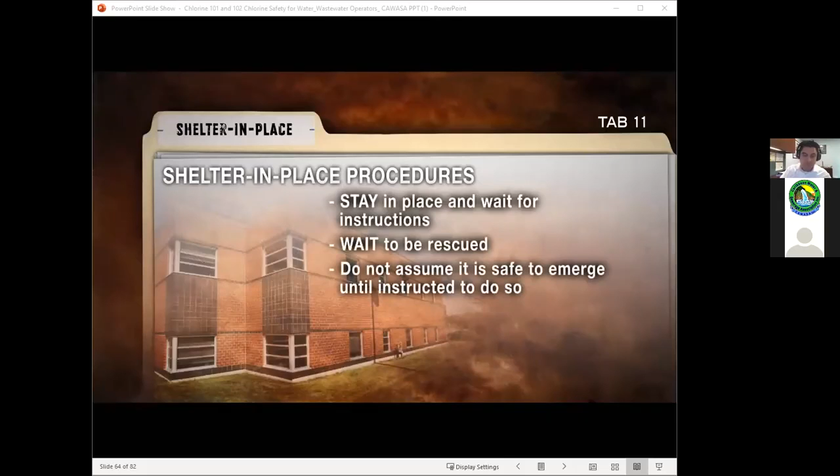Finally, practicing home emergency drills is always recommended so occupants know what to do in case of a fire or weather-related emergency, and a chlorine emergency is no different. Occupants should discuss, plan, and practice the actions they'll take in the event of an incident.

So a list of things you should consider: practice home emergency drills, know what to do in an emergency, discuss plans and practice emergency actions. And it should be the same at every one of your facilities.

Security concerns: possible crime scene, evidence preservation, suspicious surroundings and behaviors, notifications, and ensure you have identified contacts prior to any incident - who to call and when, perimeter security, entry into the incident site. In today's age, we have to be concerned about terrorism, so we never know whether it's an accident or a possible terrorist strike.

Take the time now to educate the public on shelter in place. Describe how the public will be informed of a chemical emergency in your area of operations. Explain the steps to be taken in the event a shelter-in-place order is given.

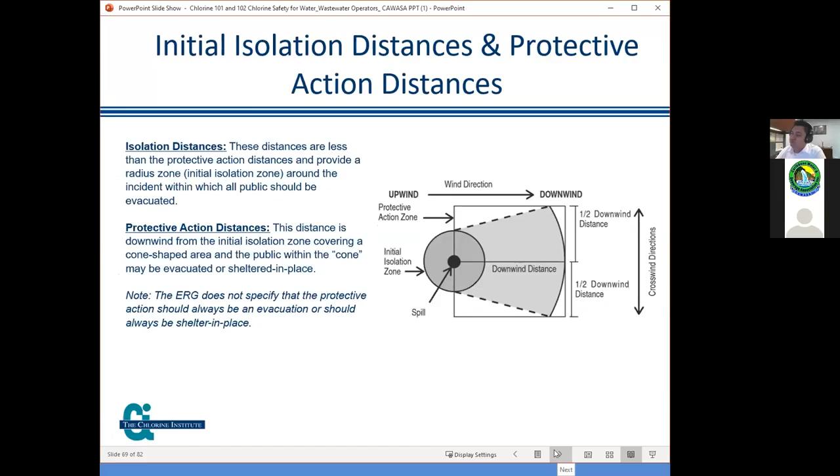The facility's emergency response plan should be coordinated with the emergency management agencies. Evacuation versus shelter-in-place decisions will always have to be made, based on the response capabilities of the facility, response capabilities of outside agencies, and contractors.

Additional information on emergency planning is available from the Chlorine Institute, pamphlet 64, Emergency Response Plans for Chlor-alkali and Sodium Hypochlorite and Hydrogen Chloride Facilities, and the Chlorine Institute FR-DVD, Chlorine Emergencies, an Overview for First Responders. Also consult emergency management agencies and fire departments.

Personal protective equipment, PPE. There's a question in the chat - please type your questions there. There's a question on what's the recommended and required PPE needed when changing 150 pound and 1 ton chlorine cylinders. We'll explore that.

PPE for areas where chlorine is stored and used: escape respirators available, normal working clothing, compliance with facility's PPE requirements. For initial line breaks - a line break is defined as the opening of a line, section of a line, a vessel, or other equipment that contains or previously contained chlorine, and includes equipment that was returned to chlorine service and is reopened to the atmosphere.

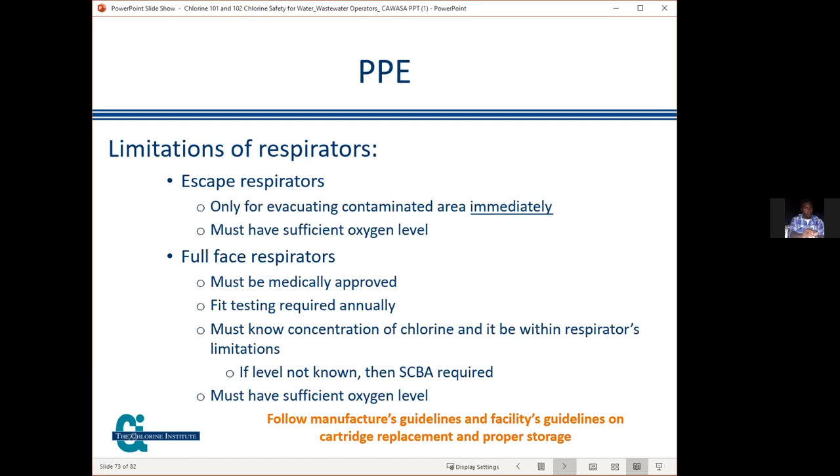If the level is not known, then SCBA is required. You must also have sufficient oxygen levels in order to use the full face cartridge filter.

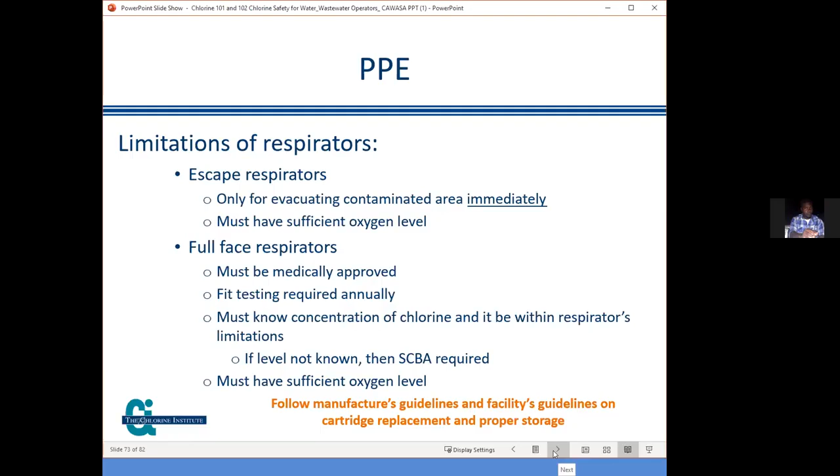Positive pressure, full face self-contained breathing apparatus, SCBA, or air supply respirator, ASR, with an auxiliary self-contained air supply and escape air provision. Protective clothing includes the following items: chemical protective suit, footwear or footwear cover, hood for protection of head and neck, and undergarments to provide thermal protection for exposure to liquid chlorine and anhydrous hydrogen chloride.

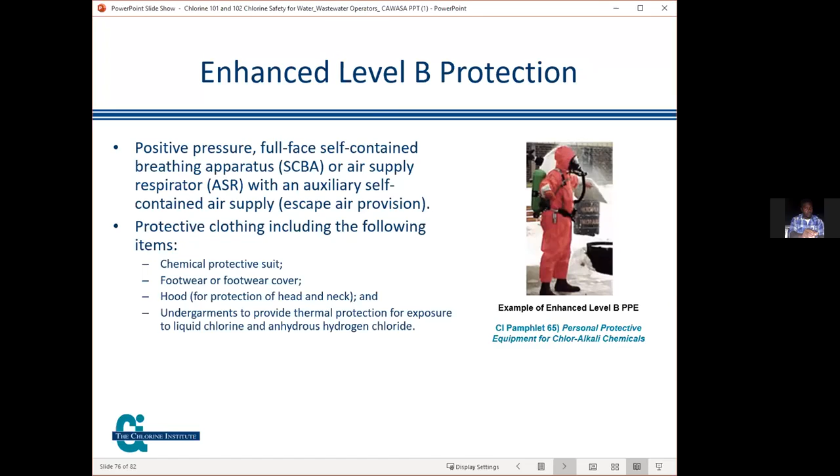Chlorine gas will permeate any opening in your protective gear, which can result in moderate to severe skin irritation. Turnout gear will also absorb chlorine and continue to off-gas after the responder leaves the hot zone, causing serious secondary exposure to personnel after leaving the hot zone.

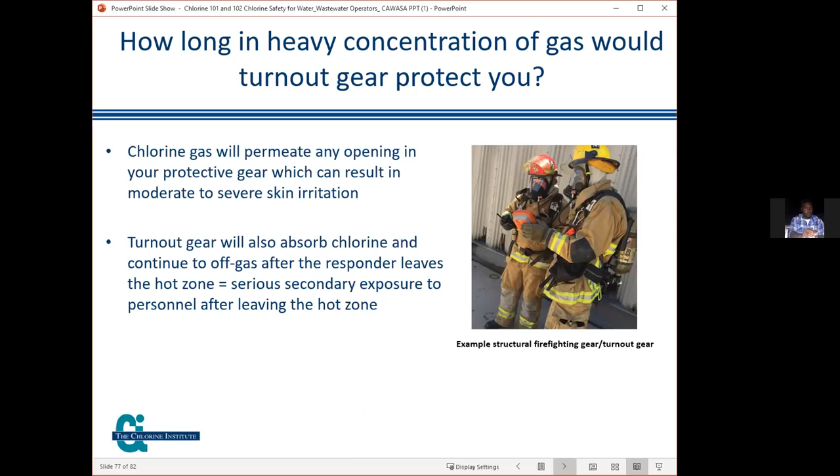Additional training.

We have pamphlets and videos on our YouTube channel, with lots of videos on how to handle all the chlor-alkali chemicals properly. We also have wall charts in English, Spanish, and French for handling chlorine cylinders, ton containers, handling sodium hypochlorite, sodium hydroxide, etc., and handling chlorine.

We also have emergency kit booklets and videos, and we maintain a technical service inbox on our email, techsvc@cl2.com. You can send any non-emergency technical question. If you come up with a question after the seminar, we can certainly take a look at it and answer it via email.

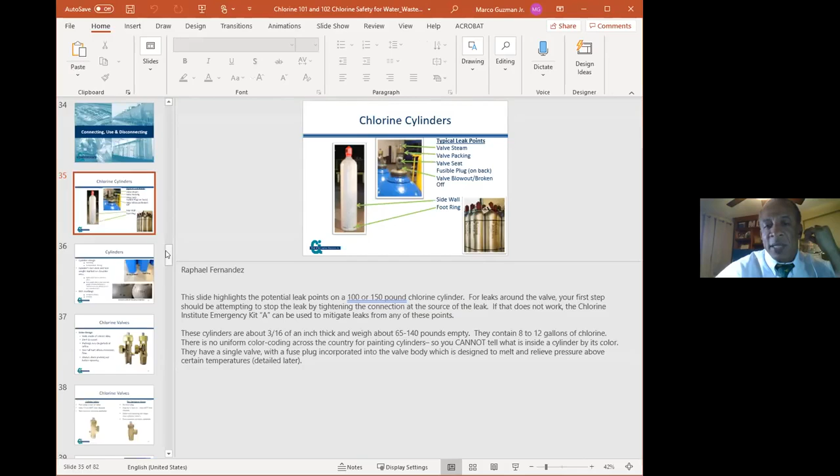The Chlorine Institute does have a pamphlet on how to use the A kit, the B kit, and the C kit. I know because I've been on the review committee for those kits for several years. We go into detail, explain when the gaskets have to be replaced, and there's a parts list in there of all the equipment you can get from Indian Springs for the kit. So the Chlorine Institute is a great resource if you want to find out how to get things like that. You can contact them or go onto their website and get that information.

Certainly, like you said Earl, those booklets for Kit A, B, and C are available on the Chlorine Institute bookstore. That's probably the best way to get them. Nearly every single pamphlet and video is free to get and download from the Chlorine Institute website and bookstore. So feel free to look around, download, and if you're having issues, you can always email us and we'll get you the right information.

They also have videos which the Chlorine Institute did on how to apply the A kit and the B kit. The Chlorine Institute has invested a lot of money in trying to help keep us all trained in how to do this, and we revise those videos and pamphlets every 3 years. They're reviewed periodically to make sure everything is up to date, and anything that needs to be changed gets updated in the booklets, pamphlets, and videos.